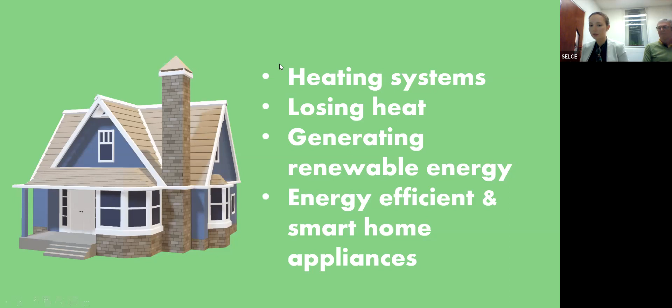So, when we talk about insulation, you're going to hear about these quite a lot. I can see Emilie has just put in there that good insulation, including windows, is the cornerstone of retrofitting, and I would completely agree with that.

Why would I agree with that? Well, actually, most of the heat we lose from our homes, we lose from the windows and doors and the loft. After that, it is the walls, and then it is the floor. So you want to think about insulating your home in that order.

We'll be talking a lot about loft insulation, different types of wall insulation depending on what building type you have, cavity wall or solid walls, floor insulation for different types of floors, and of course, windows and draughtproofing. Windows and draft proofing is probably one of the easiest to tackle, because these are the obvious ones - it's the gaps around your windows where you can feel drafts coming in, and the gaps around an old letterbox that blows open when the wind is as strong as it is today outside.

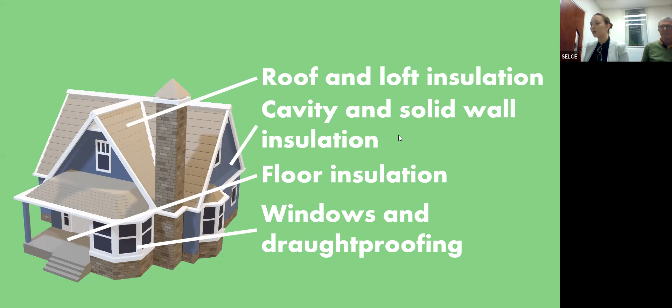Just to run you through a little bit about our program at Selce - we set up Future Fit Homes around about one year ago, and the aim of this program was to offer advice that is tailored to people's homes, because we know a lot of the advice out there is quite generic, but every home is really different. So you really need tailored advice.

Also, someone that is trustworthy and impartial. A lot of people love to speak to their builders about things, but builders tend to have a vested interest in some aspect, whether that be that they find certain materials easier to supply, or they just have a certain way they like working themselves. But our team of trained advisors don't have any of those kinds of vested interests, so we'll give you the straightforward picture about what your options are.

We also work in partnership with a cooperative of builders and contractors called Retrofit Works. So if you're interested to get a large amount of work done, over £10,000 of work, we can refer you to this cooperative and they can get someone to manage all of those works for you.

And of course, the reason that we do this is all of our surpluses go back into alleviating fuel poverty.

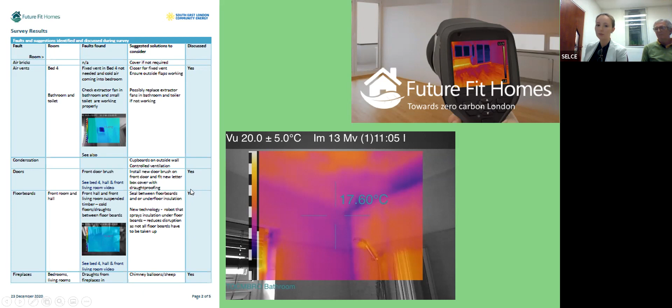But anyway, let's get back into retrofit. So why would you consider retrofitting your home? Well, there are a few motives. Reducing your carbon emissions is obviously the first one, and the reason most people are here.

Making your home more energy efficient, so you actually save money on your energy bills and use less energy to power it. It's always top of the list to save money on our bills, especially considering the news that's just come out around the increase in energy bills.

But more importantly, the comfort of your building. A lot of us will sit here and either be really boiling in our house, or really cold in our house. And that's not how it should be. If you go into a house that is well retrofitted, you will not feel that difference, that uncomfortable feeling that many of us feel.

I visited Ian's house, was it two weeks ago, Ian? Yes. And I walked in there, and honestly, I didn't even think about heating or cooling or anything like that. It was just a very comfortable environment to be in. So that is a really important reason to retrofit as well.

Health. One thing we don't think about too often is the air quality inside our homes. We talk a lot about pollution outside, from cars and from the street, but the air quality inside the house is really important, especially for people with certain health conditions, or the elderly. If you've got problematic areas with damp or mold, that is going to be very damaging to your health.

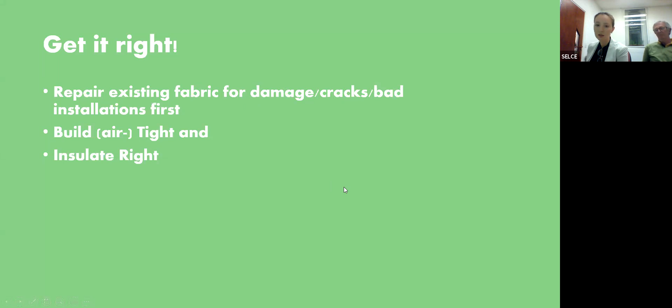Just on that topic, start with your existing fabric. If you can see obvious problems, fix the obvious problems first. If you can see damage and cracks and things like that, fix that first and then move on to what you can do in the future.

So just to talk about some of the key solutions. One thing you will hear about very frequently is external wall insulation. The reason you'll hear about this so frequently is because we've got a lot of properties in Bromley that have solid walls. Now, you might know whether your property has a solid or cavity wall.

Let me know in the chat, who knows whether their property has a solid or cavity wall. Okay, Paul knows solid wall. Will knows cavity wall, solid. A lot of solid walls in Bromley. Mercedes doesn't know. Okay, brilliant, so a little bit of a mixture. 1930s terraced, you don't know. How would you find out, Michael?

Good question. So there are a few ways to find out if you've got a solid or a cavity wall. The first one is thinking about the age of the building. If it's an older building, it's most definitely going to have a solid wall. Cavity walls were brought in later. The cavity wall is having two walls with a gap in between them. Solid wall is having one thicker wall.

The second way you can tell is from the brick pattern. Now, this is not very straightforward, not always an easy or accurate way to tell, because there are some architects that have liked different types of brick patterns, so they've changed the pattern and made it look like one when it's the other. But if you can see bricks next to each other with no change in the pattern, that is probably going to be a cavity wall. If you can see a brick with one brick length, then a short brick pushed around the other way, then a long brick and another short brick pushed around the other way, that's probably a solid wall. So that's one thing to look out for.

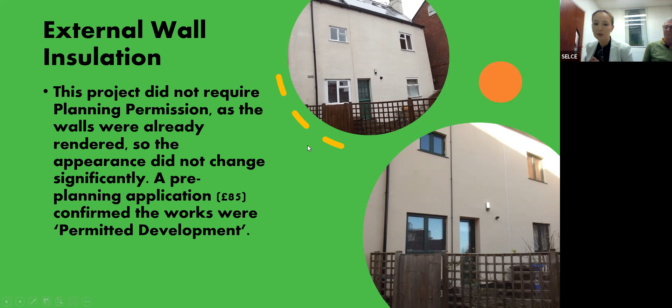The alternative is to put the insulation on the inside of the building. The problem with this is it does take an amount of space from the inside of your home. It depends on the fabric type how much it takes, but it could be up to 10 centimeters off each wall. I know people that have had this done, and they've said they didn't feel the difference in the sizes of their rooms. So you'll have to go and see one in person to judge for yourselves how much you think it's affected the wall.

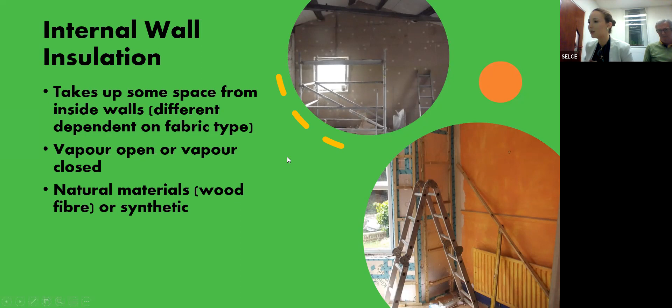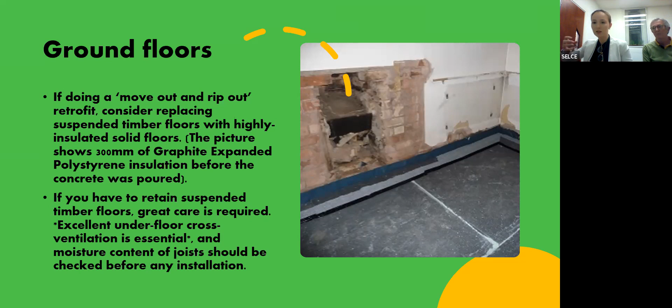Underfloor insulation is another thing to think about. This is a good thing to consider when you're changing the floors, putting in a new kitchen, or taking out all the furniture. You don't want it to be too disruptive, so think about that at those trigger points. If you've got suspended wooden floorboards, there's a cool piece of kit called Q-Bot, a little robot. You lift a floorboard up, it goes under the floorboards, puts the insulation in and comes back out, so you don't have to take all of the floorboards up. There's lots of different solutions there.

How do you pay for this work? A few options. If you've got a healthy bank account with some savings, it's always a good place to start, easiest place to start. Some options are looking at green mortgages. A few banks have launched green mortgages - if you're buying a property that needs renovating, they'll give you a preferential rate for doing green works on that property. Or you could remortgage your existing property if you've paid off a certain percentage of that mortgage. Another good option is to think about equity release.

This is an option for people that own their homes outright, don't necessarily have a huge income on a monthly basis. So what we usually see is pensioners will use this option. An amount of money is released from your home, and the provider takes a percentage of the equity in your home. So when you sell it, or if it's passed on through inheritance, they would have first dibs on that percentage of the home. Loans are another solution, but probably for smaller works. And then there are also some grants to think about as well.

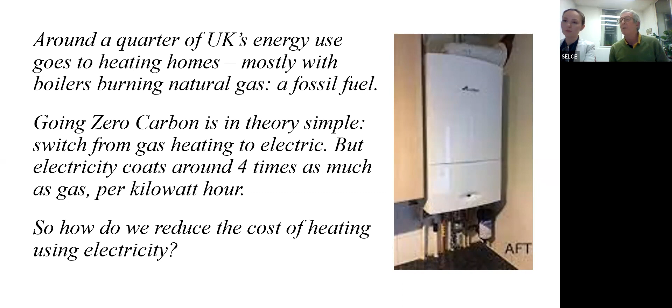We can't knock everything down and start again. We've got about 25 million houses in this country, all shapes and sizes. We can build new houses to passive house standards using virtually no energy, but that's only 0.5% or 0.25% of our housing stock each year. Meanwhile, we've got millions of old houses. Some are historic, listed, some are in conservation areas, where there may be all sorts of constraints about doing radical things. But there are also affordable and reasonable measures for all sorts of houses.

So what we did, in a particular order: we replaced the gas boiler with an electric heat pump. This is an air source heat pump, not a ground source, so we didn't have to dig up the garden and lay lots of pipes. We increased insulation as much as possible where it was reasonable to do so - in some places we did, in some places we didn't. We completed the double glazing of all the windows.

We put an electric oven in, an electric cooker with a nice induction hob top. One thing I forgot to mention - LED light bulbs, which is real low-hanging fruit. Just go out tomorrow and buy new light bulbs from Tesco's. They pay for themselves within a year. An LED bulb uses about 1/8 of the cost of a tungsten bulb, so even if electricity doubles in price, it's still only 1/4 of the amount a tungsten bulb uses. And of course, choosing low energy fittings. But today's more about the house structure really, rather than what you kit it out with. It's always worth looking at the energy rating of everything you buy.

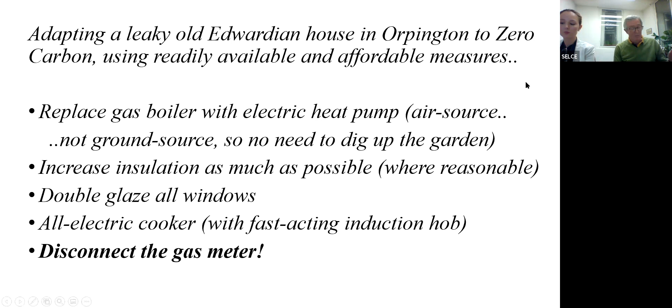So next slide - this is the heat pump. You've all got one already - it's called a fridge, you've got one in your kitchen full of tomatoes and fish fingers. This one, instead of being in the kitchen, is parked outside the house, but uses exactly the same principle. The heat pump doesn't burn electricity to create energy, it uses electricity to move heat. So what a fridge does is pump heat uphill from a cold place, the inside of your fridge or chiller box, into your kitchen, which is why the coils at the back are warm.

The heat pump takes heat out of the external air and pumps it into the house via pipes - just a couple of flow and return hot water pipes. You have to be 6 inches away from the house so there's air around it, and preferably a bit of a gap. Ideally they'd be on the back wall, but ours is on the side wall facing the neighbour, and that hasn't been a problem at all. My wife Helen was worried about whether it would be noisy. I can confirm it whispers slowly to itself - it's completely inaudible. The neighbours haven't heard it, and with passing cars, it's totally inaudible.

The technology dates from the 19th century really, domestic fridges came into their own in the 1910s, 1920s. The Norwegians are all using heat pumps - Scandinavia uses it where the temperature gets much colder than Orpington in the winter. And the Germans apparently are now installing more air source heat pumps than gas boilers - they're way ahead of us. The technology is really simple, you don't have to dig a hole in the garden, you park it next to the house and plumb it in.

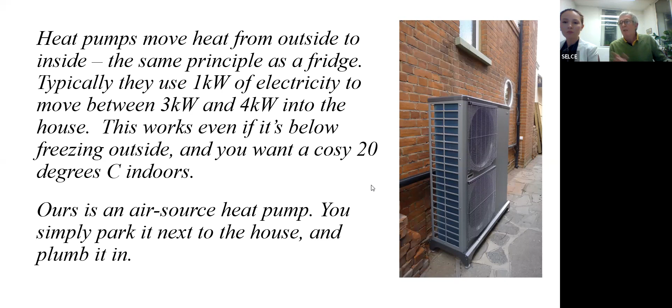This heat pump constantly monitors the external air temperature and adjusts the temperature of the water going to the radiators. So if it's really cold outside, it'll put really hot water into the radiators, up to about 50-55 degrees. If it's, say, like today, about 8 or 10 degrees, it'll measure that and send water to the radiators at more like 30 to 40 degrees. So it's constantly modulating to keep the same temperature. You can switch it lower at night, then your thermostatic radiator valves do the rest. They just adjust everything. So it's a sophisticated control.

It's a more gentle heat than a hot water gas boiler, which is why insulation tends to be rather more important with a heat pump, because you don't want the house to cool down overnight. Gas boilers tend to be enormous because they're based on uninsulated, drafty old houses which do cool down overnight, and you have to be big enough to heat them up quickly in the morning for your breakfast. So that's the controller.

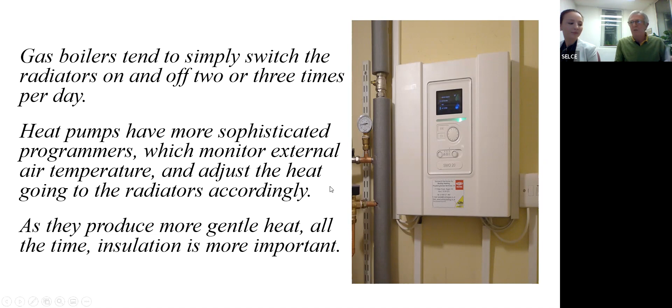Radiators. Well, some people say you have to put underfloor heating in to replace the radiator, which is nonsense. When we moved in, we did put some new radiators in, really because we wanted the look of them. We wanted some nice radiators to match the furniture. We weren't thinking of energy particularly, but they were reasonable sized, and they've been absolutely perfectly right with the heat pump in conjunction with insulation. So we didn't need to increase ours or put in underfloor heating or anything else.

Underfloor heating is very difficult and expensive in old Edwardian houses that have timber floors. It's possible, but it costs an arm and a leg. We would have to move out while it's all put in. Okay.

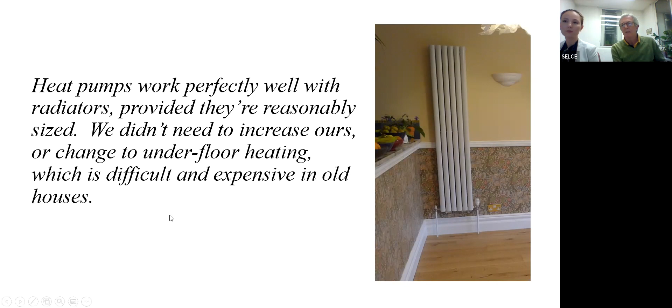So, looking at the structure of the house, it's Edwardian, 1906 or so. Like most of the houses in Victorian London, like Lewisham, Greenwich, and so on, it has 9-inch solid walls. When you get out to Orpington, up to about 1920, the houses have solid walls. After about 1920 or 30, they have cavity walls, which can be insulated easily with cavity injection. Solid walls is much more difficult.

We had a roof with hardly any insulation, about 2 inches when we looked in the loft. A timber ground floor with an extremely well ventilated space with nice air bricks, so there's copious air flowing across, which stops the joists being at risk of rotting. So we want to keep that ventilation, but of course it's cold. And half of the windows have been replaced with double glazing sometime in the 1990s.

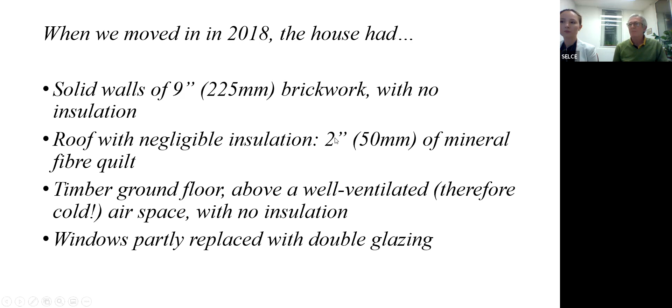So look at the solid walls. If you look at the right-hand picture, you can see - Nadia mentioned the bonding, Flemish bond - the small bricks, which indicates that it's a solid wall. And also you can measure it, it was 9 inches thick. The inside, because it's an Edwardian house, it's got nice ornamental cornices, picture rails, skirtings, architraves. We didn't want to change that, and we didn't want to change the external appearance either. So we haven't insulated the solid wall. That's the most important thing about our house, really.

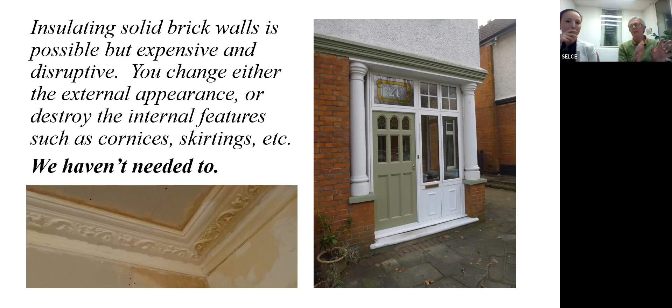One thing we haven't done. It's expensive and it can be disruptive. If it's a big house, all the bedrooms have to line, or we have to change the external appearance. If it's a narrow frontage terrace house, often there isn't much outside wall. In fact, a lot of the walls are party walls. So if you're in a narrow frontage house in inner London, there's less wall to insulate anyway. So that's the thing we haven't done.

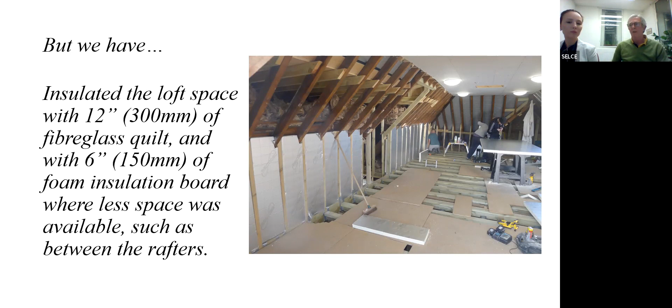Next one: the house has, rather unusually, a rather large rear extension built in the 1990s. We didn't know how well it was insulated, the ceiling, so we took the ceiling down to have a look - just a bit of a palaver. It turned out it had about 6 inches of glass fiber, so we added another 4 inches of foam board below it. So that's now super insulated - it's got the equivalent of about 14 inches of quilt, and that's been very effective. That's replastered again - that's Brian, the builder, doing the work.

There's a one-man band who did that. We did all the installation in phases - it wasn't only one fell swoop. It's taken 3 years in small chunks of time.

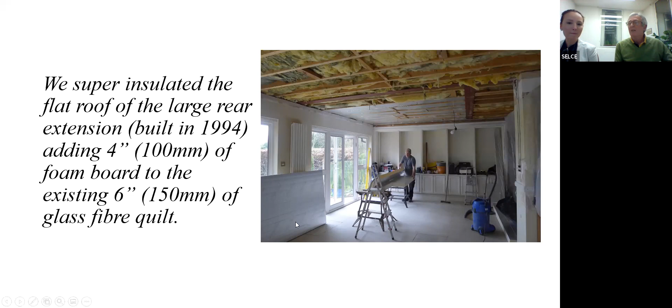Next one: the floor - as I said, it was an Edwardian house. There's a timber floor with nice air bricks around it to allow lots of ventilation onto the underfloor, which is therefore freezing cold. So we lifted the boards, put down 4 inches of foam insulation boards between them, and then put the boards back. This has been a palaver, but we've done it a room at a time - there's still one raw room to finish. We've got a one-man band builder to do this for us. He lifted all the floorboards, had a look at them, replaced the odd rotten one, and screwed them all back down again. So we've kept the ventilation under the floor, but it's now a very well insulated floor.

This isn't possible, or it's much more difficult, if you've got a concrete floor, but if you've got a suspended timber floor with underfloor ventilation, it's a good idea to do this. I wouldn't say it's the lowest hanging fruit of all the insulation things to do, but we certainly felt it was appropriate to do in this house. Next one.

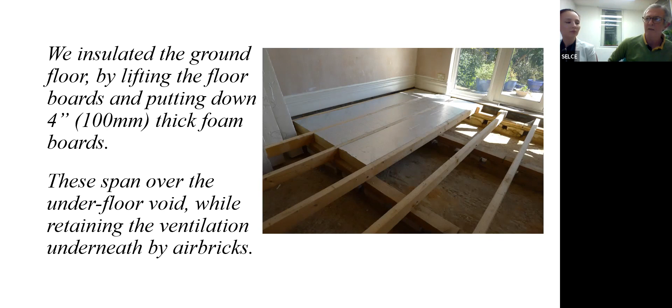When we bought the house, half of it had been reglazed with double glazed windows in the 1990s, and half was still the original wooden windows from the 1900s. So we replaced all the remaining wooden windows with new plastic windows, which are marvellous things really - a triumph of technology. They're very affordable these days. As long as you go for the argon filling, the 20mm air gap, they completely stop the drafts, and they look good - that's the thing. The estate agents love these. They're sexy for estate agents.

So I think looking around our area, it's hard to see any houses which haven't already had UPVC windows. If you take an area like Orpington, nearly every occupied house has done it already. I suspect a lot haven't insulated their loft with quite so much enthusiasm, because I think estate agents never look in loft spaces really, but they do see the appearance of a house. So these windows improve the appearance of the house and are fantastically energy efficient.

They'll reduce the U value from single glazing of about 6 watts per meter squared C down to about 1.5, so you save about 4.5 watts per meter squared per degree centigrade. Whereas if you dry line a solid wall, you might reduce it from say 2 to about 1 - you save about 1 watt per square meter C. So double glazing the windows is 4 or 5 times as effective per square meter as dry lining a solid wall. It's totally non-controversial, except of course if you're in a conservation area, then there's all sorts of issues. But nowadays there are marvellous heritage double glazed sash windows in plastic, which are fabulous - we actually installed these in our previous house in East Dulwich.

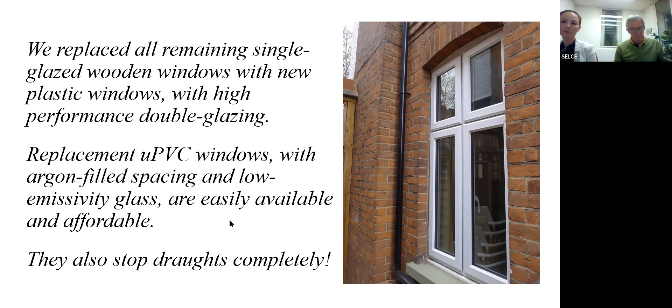So energy performance - it's a big house we've got, so this is one of the biggest heat pumps you can get. It's 16 kilowatt, but that's the maximum amount of heat it can bring into the house, not the amount of electricity it uses - about a quarter of that. This machine has a factor of 3.27, meaning on average, to pump a kilowatt of electricity will pump 3.27 kilowatts of heat into the house. So it reduces the cost of electricity by a factor of 3.27, bringing it down to close to the cost of gas.

By my calculator, the house needs about 10 kilowatts to keep it warm when it's freezing outside. And of that, three quarters - 7 kilowatts - is the heat loss through the walls. So if we did insulate the walls, which is the thing we haven't done, you would save a lot more of the energy that the heat pump uses.

For comparison, the old gas boiler we took out was rated at 30 kilowatts, twice as much. That's because gas boilers always tend to be very overrated - the house never uses anything like that many kilowatts. It's partly because it's heating the hot water very quickly, but mainly because it's oversized to heat the house up very quickly from cold, with superheated water in the radiators. So this heat pump has been absolutely fine - it's got plenty of spare capacity, and it's the biggest you can get.

Our son Henry has a terrace house in West Dulwich, and he's got one half the size - instead of being 4 foot tall, it's about 2 foot tall, and it's rated at 8 kilowatts. So this is one of the biggest ones you can get for that size property, and it works - heats the hot water really well. This morning they've had piping hot water.

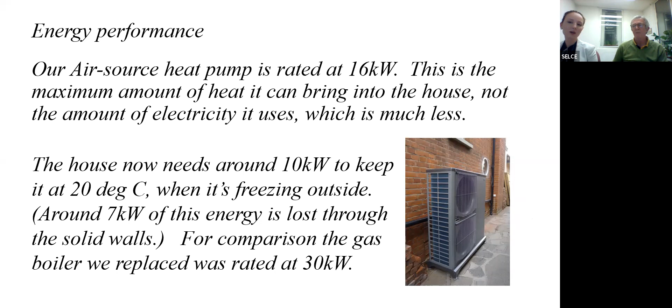So in the meantime, you need some help with the funding, which is what we got. We're one of the very few people who got the Green Homes Grant scheme. It collapsed into a shambles in April last year - far fewer people got it because it was so bound up with bureaucracy. But we got the grant of £5,000, which was paid up front.

I understand the government's going to reintroduce it - it's going to be called a boiler upgrade scheme, plus from April the 1st there'll be another £5,000, or possibly £6,000. It's not completely confirmed yet, but around about £5,000. If anyone in the chat has more information on that, because I know there's a lot of energy geeks here who've been following it closely, do let us know.

So, the problem is the box just costs a lot of money to buy. Installing it was £10,000 - we didn't have to replace the hot water cylinder, and we think it's been a good bargain, but it certainly helped having that money up front. You can also get funding through the renewable heat incentive payment, which tapers over 7 years, but that's being scrapped as well, isn't it, in March?

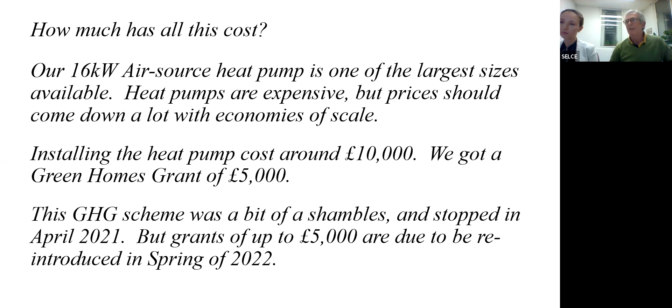We almost had to do a year - we went in March last year, so we're coming up for the first 12 months. It's looking very good, despite changing gas to electricity, which costs much more per unit. The heat pump, with the increased insulation, reduced our energy cost to just over £100 per month. That's heating the house, heating the water, all our electricity bills, cooking, all the LED light bulbs, and charging the electric car at night. It's probably going to earn about £110 per year.

Of course, this is all going to double in April. House electricity prices are going up about 54% this year, and they may go up even further. So it's bad news in terms of costs, but if the cost of energy doubles, that means the cost benefit of insulation also doubles, because the benefit of insulating your loft will be twice as great if energy costs twice as much. You can save twice as much cost.

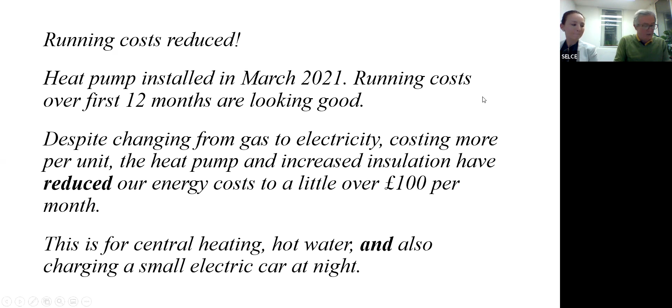Because the cost of electricity is going to rise. And energy tariffs, well, this is a nightmare. At the moment it's all in abeyance because all the special deals have gone, because of people going for the new Ofgem rate. But we use an Octopus Go electricity rate, designed actually to charge electric cars very cheaply in the middle of the night. We also use the heat pump in the middle of the night to heat hot water.

So our electricity-heated hot water is unbelievably cheap - we pay about 5 pence a kilowatt hour, and then the heat pump reduces the cost by a factor of 3 or 4, so it's a penny a kilowatt hour, which is actually much less than we were paying for gas to heat hot water.

Because we've taken the gas meter out - a long story, which I won't bore you with, trying to get the service providers to remove the gas meter - we no longer pay any gas service charge, which is £100 a year, just for the privilege of having a gas pipe before we use any. So we've saved money there, and we only pay one bill. Just over £100 a month includes all of our electric costs: cooking our dinner, heating the house and hot water, lighting, the fridge, television, everything.

But energy costs are going to increase a very enormous amount this year, partly because the price of gas is going up. Even though our supplier claims to use no gas in generating electricity, for some obscure reason the cost of electricity is tied by the market to the cost of gas. So if gas doubles in price, or quadruples, electricity seems to have to go the same, even though increasingly our electricity is generated by renewables, wind turbines, and solar panels, which use no gas at all. There's an anomaly in the market at the moment that electricity prices are going up as gas prices go up.

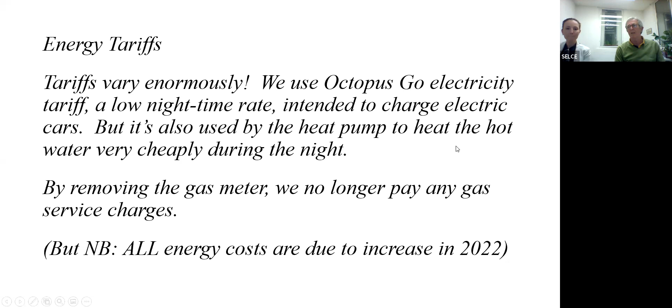So what we also did - I'll put these on at the end really, though we actually did this first - we installed solar panels as soon as we moved in, 15 of them in 2019. At that stage we weren't planning to put in a heat pump, and we didn't put in a battery. The solar panels got us a tiny feed-in tariff from the government, but mainly they reduced our electricity bills. They probably generate about £600 a year, on a £7,000 investment, so they're good value.

But interestingly, although they're not mechanically or electrically linked or coordinated with the heat pump, they do work extremely well together. On days like today, for instance, when it's sunny in the morning and reasonably cold, we find the electricity generated by the solar panels will power the heat pump. So I'm proud to say for 4 hours today, between 10 o'clock and 2 o'clock, we didn't import any electricity to power the heat pump.

This only works in the spring and the autumn. In the summer you're generating a lot of electricity which isn't needed by the heat pump, and in the winter there's not much sun. But together they do work - the heat pump has improved the cost benefits of the solar panels we'd already put in. I'll put them at the end, almost as an annex, rather than something essential for zero carbon. The essential thing is the heat pump, so you can cut off the gas. Solar panels are a bonus if you happen to have a roof facing south, southeast, or southwest.

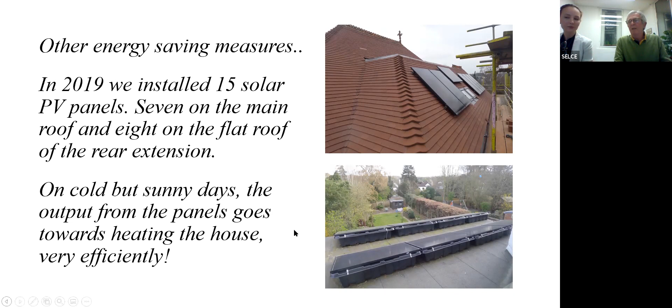The next one. And finally, we've got an electric car. So I drove in this evening.

Cars are interesting because it's not directly to do with the house or the heat pump, but we charge at a very low rate in the middle of the night with a low tariff electricity. And a lot of the future prospects are using the batteries in cars to assist with balancing the energy needed in houses. So you can charge your car battery on a very low tariff at times when demand is low or the sun's shining, and then use that battery to cook your dinner at times when the electricity is very expensive.

And apparently one Nissan Leaf will cook the dinner in 10 houses. But that's the new technology coming, it's called vehicle to grid technology, V2G. We haven't got that, but that's kind of the future.

So anyway, that's sort of contributed to our changing everything to electricity. So the future is electric, and a major element to that is converting our existing housing stock to electric heating rather than gas, and principally through air source electric heat pumps.

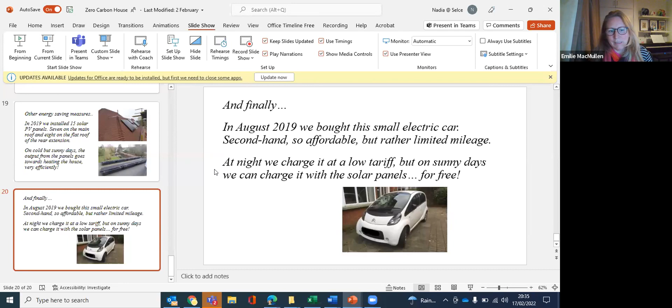Hello, yes, I'll send you a message now with the questions. I'm hoping they'll paste in okay. I might as well read out the first one. SL asked at the very beginning, is it necessary to change the windows when they do external wall insulation, particularly with bay windows?

I think that's probably a question for me. It's hard to say. In some cases, yes, and in some cases, no. You don't need to change the windows completely, but the insulation needs to integrate with the window to make sure there aren't any heat losses around the edge, or any thermal bridging around the edge of the window. So no, you don't need to change the windows completely, but take care. I think that is the answer.

Ian, have you got any comments on that? I think it just depends on the circumstances. We replaced some of our windows and not others. We didn't put external wall insulation, but I don't think it would have affected the windows directly very much. It's just the detailing of the reveals, no fundamental problem. It's a very good question though.